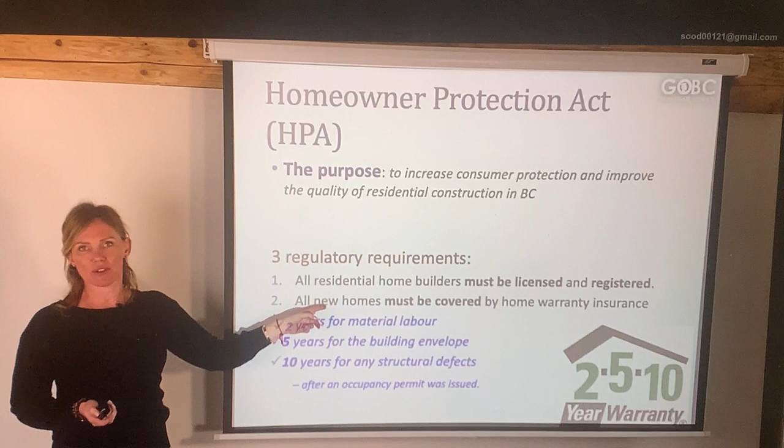So far there are 3 requirements. All the builders have to be licensed and registered. Who are they registered with? With BC Housing, or the Licensing and Consumer Services. They have to make sure they're on that system, and make sure all the homes have coverage for 2, 5, and 10 years. When I say all homes, I'm talking about new homes. If it's a new build, that's the one that has to have those warranties. Number 3, all the homes must be registered in that new home registry plan.

So basically, if you're working with a purchaser who wants to buy one of the new builds, or if you're shopping for yourself, you go on the BC Housing website and type in the address information for that property you're planning to purchase. This way you can determine the licensing and warranty status of that home. So you can find all the information. What type of information? Pretty much everything.

Can you find information about the builder? Yes, you can. Is he licensed? Is he properly licensed? Is the home properly registered? The warranty insurance, when did it start? The commencement date of the insurance. If it's an owner-built home, can it be offered for sale? Can you actually sell that house? All that information will show up on that BC Housing website.

So what if you want to build a house just for yourself? You bought a lot and you're planning to build and live in it. Do you still have to be licensed? No, you don't have to. That's an exemption if you build for personal use. The person must intend to personally use the home for at least 1 year from the date of occupancy and may not rent it during that year. So basically, when you get the occupancy permit and move in yourself, within a year you're not allowed to sell it or rent it out to anybody else.

But what happens then? What if you want to sell it after? What if your plans change and you decide to move to a different province? Can you do this? You have rights, you can sell the house, and that's where you check back on the website to see if the owner builder can offer the house for sale.

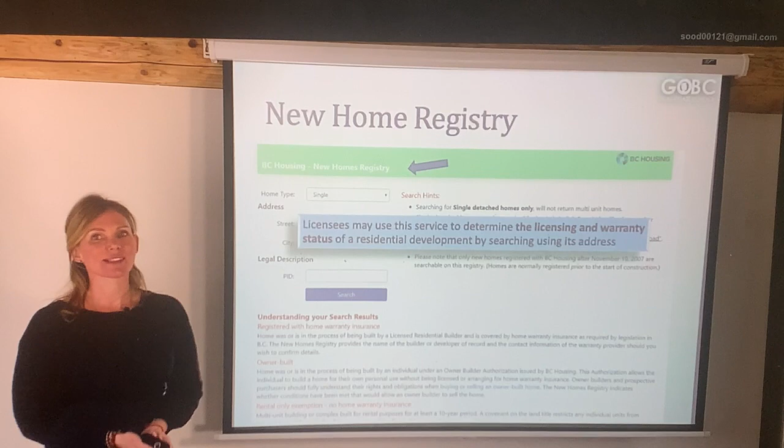So as an owner builder, you don't need to have that 2, 5, 10 year insurance, you don't have to purchase it. But if you're planning to sell it, you will be personally liable to the new purchaser for that warranty. So you still have to provide it one way or the other. Just know if anything happens to the house within the 2, 5, or 10 years, as the owner builder you will be personally liable to the new purchaser for that.

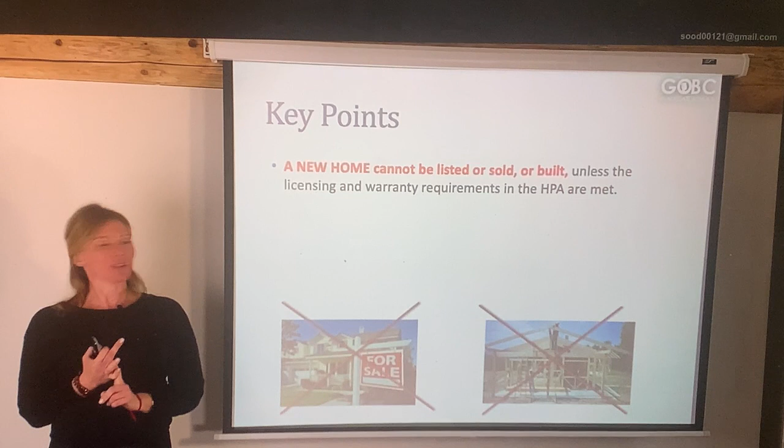Okay, key points, let's go back over everything. Can you sell a house that has not been approved by HPA or BC Housing? You're not allowed to. The house cannot be listed, sold, or built unless all the warranty requirements are met by the HPA.

Number 2, what if your home is less than 10 years old or has been substantially reconstructed? What is substantial reconstruction? If you renovated the property more than 75%, that's substantial. If you add to the foundation of your property to make a bigger house, that's also substantial reconstruction.

Licensees should take steps to ensure that all insurance and licensing disclosure has been properly done under the HPA and incorporated into the contract of purchase and sale. So if you're working for the buyer, you add it into the contract, stating we want to see those warranties, we want to make sure the house is protected. Buyers must be aware of all the home warranty coverages to ensure the warranty documents are properly transferred, so make sure the buyer is aware. And then the last one, if you are representing the owner builder, then what do you do?

You want to make sure that everything is done properly, right? Ensure that all the disclosure obligations have been met by them and that they will be able to pass it on to the buyer, so there's no issues.

Okay, so the building code. I don't know if you guys know, but we have a national building code and provincial building codes, basically the codes that the builders have to abide by. On exams, sometimes they'll ask you a basic, simple question, asking what are the top objectives of those codes.

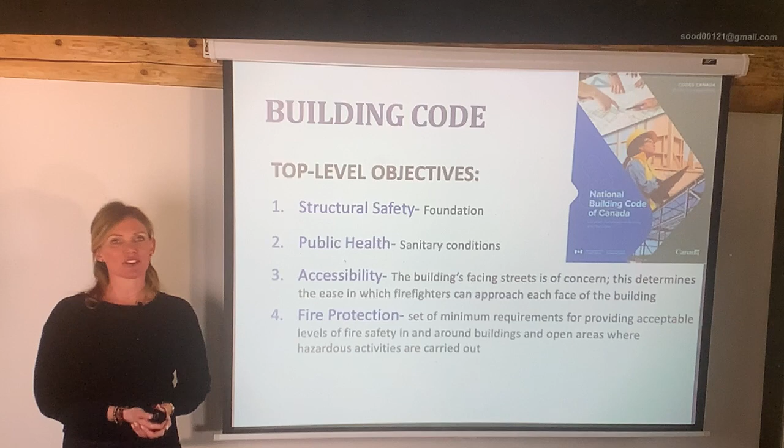Pretty straightforward objectives, right? The first one is structural safety, making sure the foundation and structural parts of the building are good and solid. Public health refers to sanitary conditions, making sure it's livable. Accessibility means, is it easy to access through the road? How fast can we access the building? They're usually referring to firefighters - if the house catches fire, how fast can firefighters get into the building. Fire protection means they have at least minimum standards of fire protection in that building. Basically, that's it, those are the main objectives.

So we have 2 questions. Let's work on question 1. Which of the following is the main objective of the building bylaws, such as the National Building Code or the BC Building Code? What do we have here? Which one definitely fits in? Is it curb appeal? Is it aesthetics? Is it public health, green building? Definitely public health, right? Because that's the sanitary conditions of the building.

Good job. Question 2 is the opposite question: which of the following is not a top level objective of the National Building Code or the BC Building Code. So we have structural safety, which is the foundation of the building, public health, sanitary conditions, we have aesthetics, making sure it's beautiful, and fire protection. Which one is not one of them? Of course, aesthetics, because you don't have to have a beautiful or pretty looking building for the building code - they don't care. But health, fire, and structural safety, that is a must.

Okay, so we're going to talk about the metric construction module. This is something our students don't really like or understand, but I'll make it nice and simple for you, I promise. So basically in Canada and US, you guys like to use the imperial system, so you use feet and inches. But the whole world uses the metric system, that is millimeters, centimeters, kilometers. That's kind of what the metric is about.

So when it comes to building, they decided to have a uniform system so everybody can understand this. So what they've done is Canada and US said, okay, we'll give up on the imperial and switch everything to the metric system. So this is what the changes came through. Some changes were soft, meaning they're not a big change, just a slight change - the definition will change, from inches to millimeters, so the verbal definition changes but the size itself will not change.

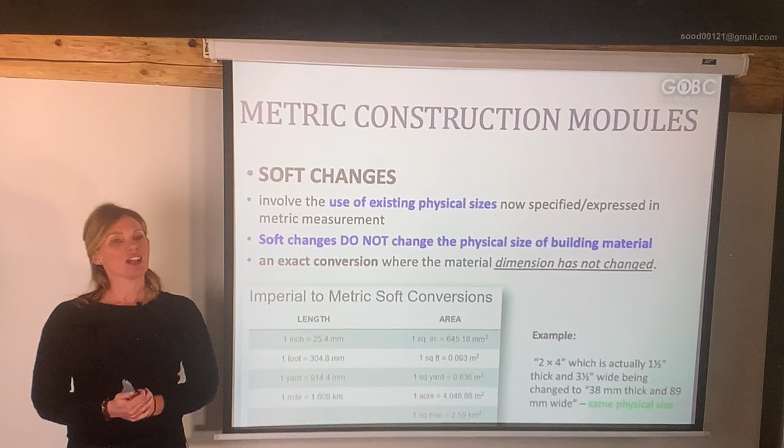So basically we change the way we phrase it - instead of inch, we're going to call it millimeters, okay, but the size will not change. So if you convert 1 inch to millimeters, it will come up exactly as 25.4 millimeters, and that's it, okay. So that is a soft change - we changed the verbal definition but haven't changed the size. It's exactly the same size, okay.

But when it comes to the hard change, that means they actually made a change - from verbal description, from inches to millimeters, that's the first change, but also in the size. So for example, if I take 12 inches as an example, and convert them with a hard change, it comes up to 300 millimeters instead of 304.80. So if I take 25.4 millimeters and times it by 12, it comes up to 304.80. That is a soft change.

Why is it a soft change? Because I just changed the inch to millimeters, but I haven't changed the size - that means 304.80 would stay as is. But if I change the actual size, and instead of 304.80 I come up as 300 millimeters, so I change the size too, then that is a hard change.

So a hard change is basically a bulk change. I'm not going to just take like 304.80, that's too precise. I'll just make it 300 millimeters. You see what happens? I just made it a flat number.

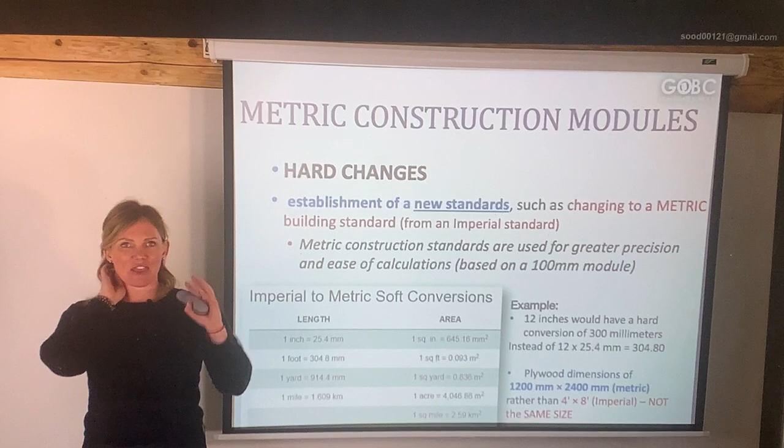So how do you know if it's a hard change? It changes the size, and that's all I want you to know. There's no math on this. Nobody's going to give you math questions, but they will talk about something like this, I'll show you the question.

Question 3: if the metric building module is increased from 100 millimeters to 150 millimeters. This would be considered as which of the following? So did the verbal description change? Not in this case, it's from millimeters to millimeters. But did the size change? Do you see what matters? And if the size changed, yes, 100 millimeters to 150, that's the size change. That is definitely a hard change. Okay, so that's what I want you to look for.

So now we're going to talk about the actual measurements, when it comes to measuring an apartment building. Let's say you have a new listing, it's a 2-bedroom apartment with a beautiful patio, and you say wow, look at that patio, it's the largest one out of all your neighbors. You have the largest patio. So can you include that patio into your square footage?

I hope you said no. So how do you know what's included in the square footage? It's everything that is livable. Whatever you can live in, that's what you're going to use as square footage. That's why a lot of new developments have small closets. Why are closets so small? Because they know that's not real square footage, right? It's excluded from the square footage.

So this is a list of things you're not allowed to include into your square footage: garages, porches, balconies, decks, unfinished floor areas. Now that's a question mark for a lot of people, they say what do you mean? I have an unfinished basement, it has a lot of square footage, why can't I use that as partial towards my square footage? And he says no, you have to add it as an extra description. It says comes with unfinished basement, but you're not allowed to take that square footage from the basement and add it to your main square footage.

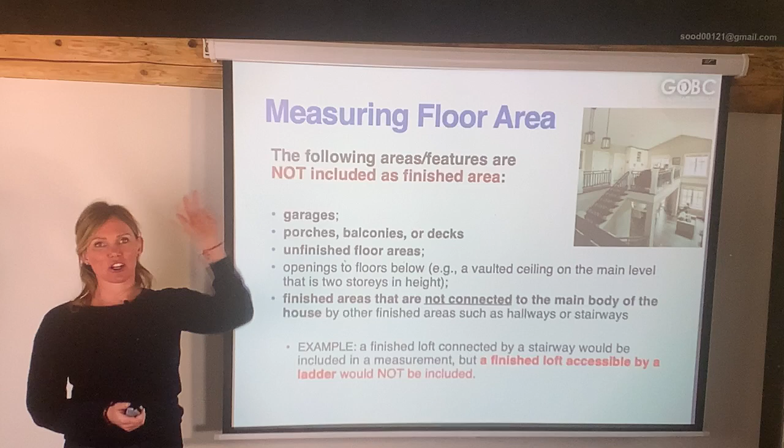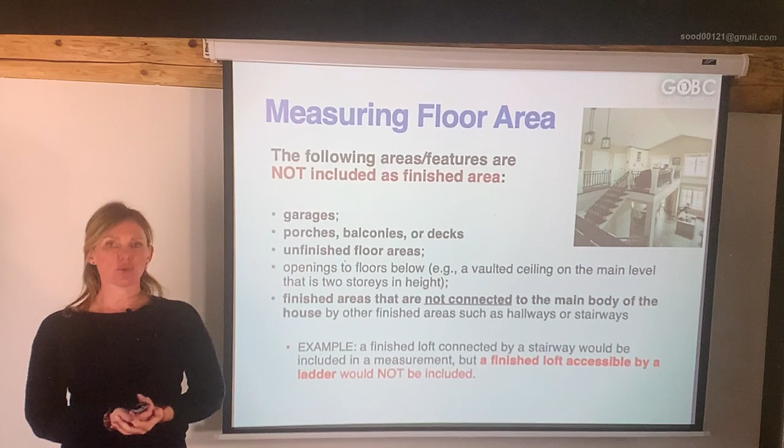And opening to floor below, so if it's a vaulted ceiling covering 2 floors, you're not allowed to add that as extra square footage. And finished areas that are not connected to the main body of the house - what does that mean? If you have an attic that's not connected, no staircase, no way to get in there, just a detachable ladder, you're not allowed to use that as square footage. But if that attic had an actual built-in staircase so you can walk there, then you can use that as square footage. Okay, let's continue.

Okay, so now we're going to talk about substructures and superstructures. How do you know the difference between those two? If I say sub, think of it as a subway - what is the subway? It goes underneath the ground, right? So same thing with a substructure, that's something that goes below the ground level. For us, that will be the foundation of the building. It's built below ground level, and it serves as support for the building or structure - it supports the whole building, that's the whole idea of the foundation.

For the exam, they like to ask you about damp proofing, and they like to ask you that as a definition. They will say, what does this stand for? I don't know if you guys know what that is, but it's that black sticky material they apply to the walls of the foundation to make it waterproof.

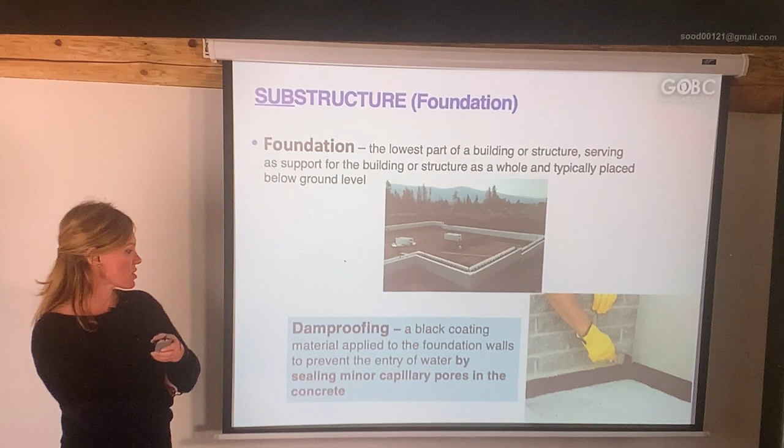They seal all of those capillary pores in the foundation with that black sticky thing, and it seals it so the building becomes waterproof. That's exactly what this damp proofing is - black coating material applied to the foundation of the walls to prevent the entry of water by sealing minor capillary pores in the concrete.

So this substructure is below the ground level. The superstructure is everything that is above the ground. And we have a lot of them that we're going to talk about - the joist, the stud, the plate, the truss, and gosh, there's a lot of them. You never know which one is going to be yours on the exam.

So let's start with the joist, stud, and the plate. When somebody says the joist, the stud, and the plate, look at the picture, that will help you out. So if I want to put something into this wall, what am I looking for? I'm looking for the stud, because that's where I can hang things, heavy things. So the stud is a vertical frame, it goes this way, that supports the wall, behind the wall, so it supports the wall.

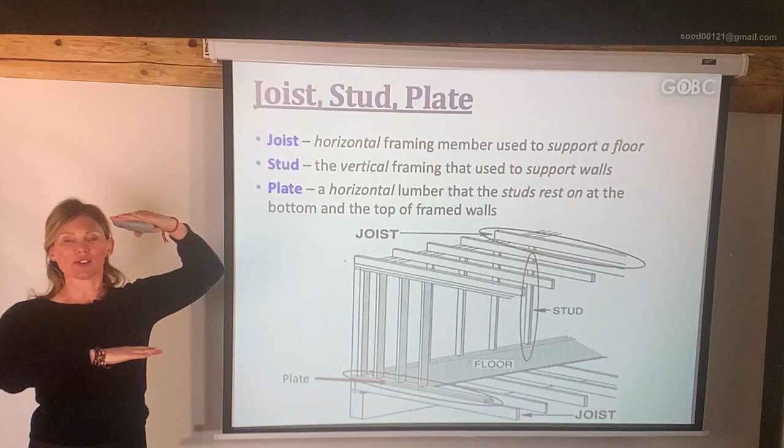So if you know what the stud is, then you have to know what is joist. Joist is always opposite from the stud. I had 2 older ladies in one of my classes, and one lady says to me, come on Yana, this is a stud, you should know that. The whole class laughed. But anyway, stud is always vertical, and if you know what stud is, then you know what joist are - joist is opposite, it's horizontal. Now think of the joist as supporting the ceiling and the floor, so it's in the ceiling and it's in the floor. And the stud will be opposite, it's behind the wall, so it supports the walls.

Good, now the next one is a plate. Think of the plate as the actual plate - if you're eating your supper, your dinner, you want that plate to be horizontal in front of you, and then you will eat it. Because if that plate was vertical, then the dinner ends up on your floor, not good. So same thing - think of it as a washer in between the joist and the stud, it's the plate in between. So it's the horizontal one where the studs rest upon.

Then we have to know the different types of roof structures - truss and the rafter. Keep it simple. When I say truss, think of it as a prefabricated roof, something that you can't really build yourself. It's engineered, it's more complicated if you look at all the designs in here. So it's something that supports the structure, but it's prefabricated.

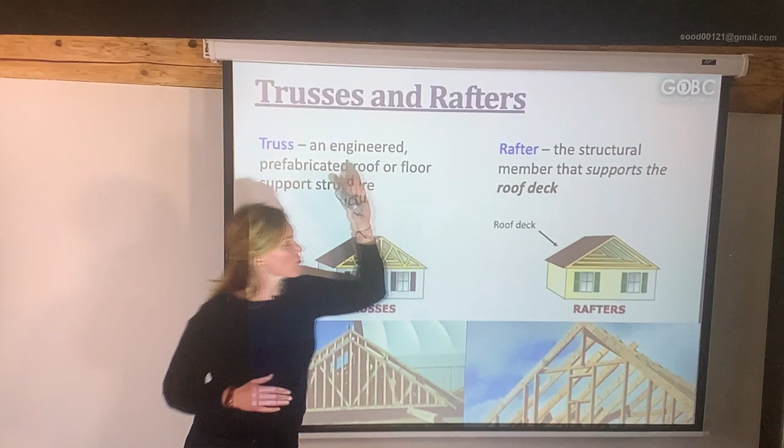The rafter is what they want on the exam. So rafter, think of it as a roof deck - it's a structural member that supports the roof deck, something you can build yourself, and the roof deck goes on top of it. So in the exam, if we talk about the rafter, I always think of it as R and R - rafter comes with a roof deck. If they don't talk about the roof deck, that means it's not a rafter.

Keep it simple. Okay, question 4 - look, they're looking for that rafter. In residential building construction, the term rafter refers to roof extension used to provide an extra floor area, and the windows - I don't see the roof deck anywhere, so that's not the answer. Option 2, the structural member usually wood placed at the top of the window opening - I don't see my roof deck anywhere, that's not the answer. The roof style commonly known as a hip roof - we never even talked about this, so it should be none of the above. So again, rafter, look for the keyword of roof deck. That's it, keep it simple.

The lintel and the header, the two things that you have to know. One comes from the outside exterior openings, the other one's for the interior opening. Think of the one that we have in the house because that's the easy one to remember - on top of your doors, on top of your windows, you have the headers. The header is the interior opening, so that's a supporting structure in the interior of the house. But the lintel, it comes supporting the structure over the exterior opening. So from the outside of the building, if you have something on top of your window, that is a lintel.

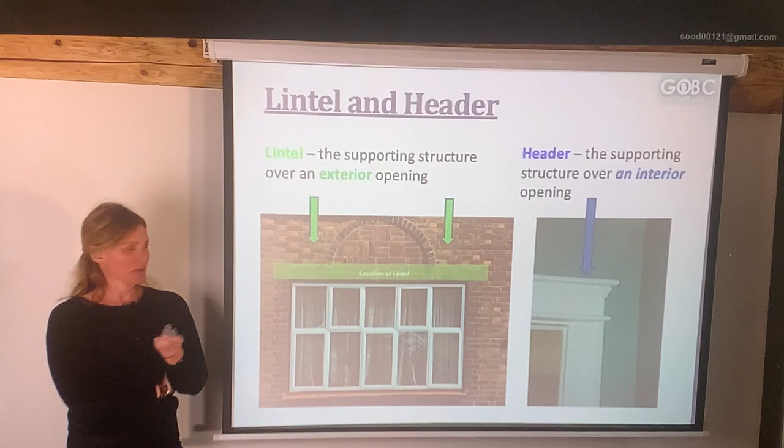So think of the lintel outside, the header is inside. Question 5: which of the following statements regarding the superstructure terminology is true? Option 1, plate is a vertical lumber. I can stop, because what did I say about the plate? If you're eating your dinner, that plate better be horizontal, not vertical. So if it's vertical, that is a false statement.

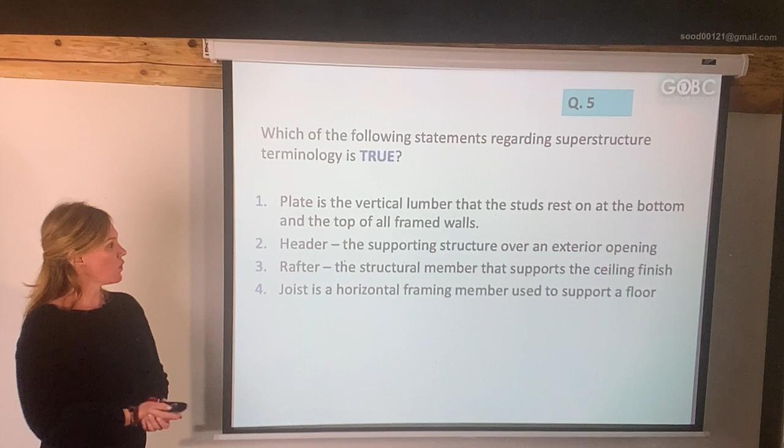Header, supporting structure over the exterior - no, header is the inside of the house, right? On top of your doors and windows. That's false. Rafter, I'm looking for the keyword of roof deck. Do we have that? Nope. And the joist is horizontal. So if the stud goes this way, the joist goes horizontal. So option 4 is the right one.

When you go through the questions, I want to make sure that you know the other options - why are they true or why are they false? Make sure that you highlight those keywords so this way you know what you're aiming for.

Good job. Okay, so what can you build a building out of? Could that be a log building? Have you seen the log buildings? Yes, we have those ones. An A-frame building, it's an older type of style. It's brick, that's Europe. Stone, concrete, Western platform wood frame. We have a lot of those ones in BC, and the post beam and plank.

So for the example, they ask which one is the most commonly seen in British Columbia. And if they don't specify the type of house, then that would be a wood frame. Why don't they specify? Because if I say a high rise, then that would be concrete. But if I just say which one is the most commonly used style, then that's a wood frame. You get the point, right? Because wood frame cannot be used for high-rise buildings.

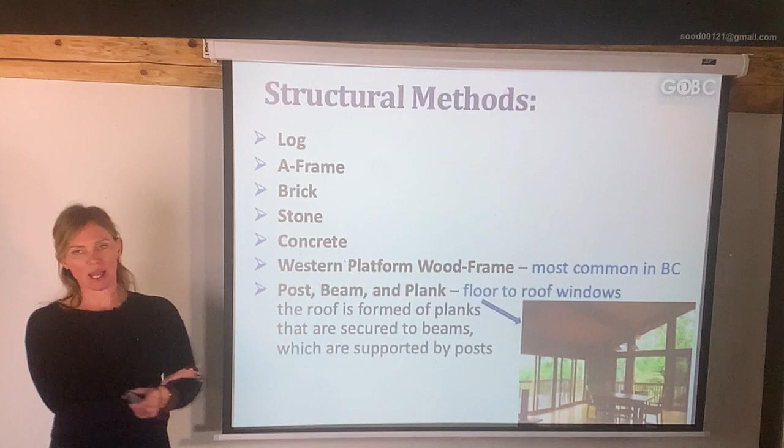High-rise is only concrete, it's not strong enough. Post beam and plank style, now usually the style that has the windows all the way from the floor to the ceiling, so it's very, very large windows. Post beam and plank is the roof formed of planks that are secured by beams, which are supported by the posts, right? So that's why it's post beam and plank. It's pretty easy to remember.

Question 6: which of the following statements regarding the post beam and plank style is correct? Option 1, it maximizes utility of a narrow lot according to the zoning criteria. We never talked about that. That's definitely not true. It is one-story building, usually incorporated with the garage under the continuous sloping roof.

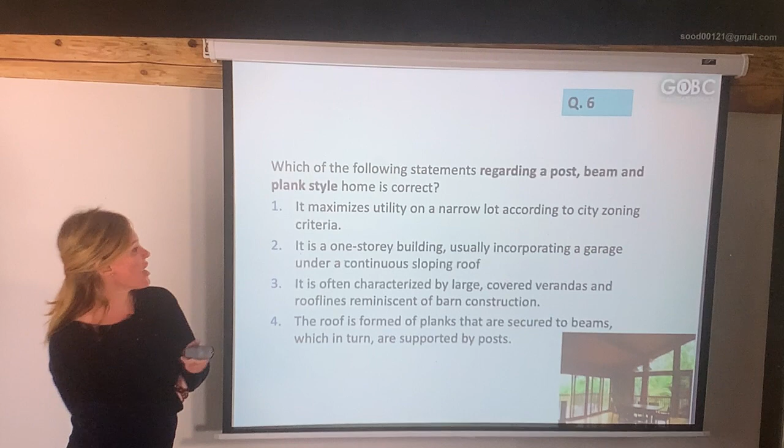Can you put that rancher in here? Because that's the definition of a rancher, one-story level. I'll teach all that stuff later. Under one roof, incorporated with the garage. Okay, so that's definitely not this style.

It is often characterized by large covered verandas and roof lines - so that's not the one. And roof that is formed by planks that are secured by beams, which in turn is supported by posts, right? You see a lot of keywords, so you know option 4 is definitely the one. All the other ones, don't panic, I'm going to explain the styles. It's coming up, it's coming up soon.

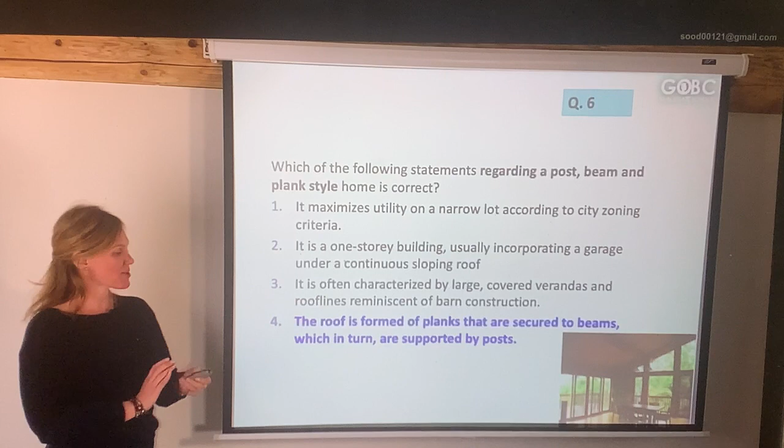Okay, question 7: one way that housing styles can be classified is by the structural method used in construction. Which of the following terms does not describe a type of constructional method? So which one is definitely not a method of construction here? Do we have the log way? Yes we do. Concrete blocks? Yes we do.

Vaulted ceiling - what's a vaulted ceiling? That is a high ceiling, okay? And post beam and plank. So definitely no, vaulted ceiling, because that's not a structural method, it's not the type of house that you will have, it's just one of those, how to call it, a feature of the home. On the exam, sometimes they'll give you drywall - same thing, drywall is just the material that you use inside of the house, it's not a structural method. So no drywall, no vaulted ceiling.

So now we're going to talk about different types of frames. You have to know the difference between the wood frame, the concrete, the steel frames - there's 4 different frames that you have to know. So what do we use the wood stud frame for? It's very commonly used, but it's used for what type of building? High-rise or low-rise? Now, that's definitely for the low-rise, right?

So this is something used for the low-rise building. You can't build something higher than a 6-story building with a wood frame because it will fall, right? So stairways must be enclosed with fire-resistant material if you're building something higher, like under the 6th floor, but you have to have the stairways enclosed. So what are the advantages?

It's a low cost, right? So think of it this way. In British Columbia, we have a lot of wood, a lot of trees. So for that reason, that is an advantage, it's a low cost method. And what is the disadvantage? What happens to wood sometimes? It shrinks, right? So if water goes in there, it can do all different things to it. So that's the only issue with the wood frame.

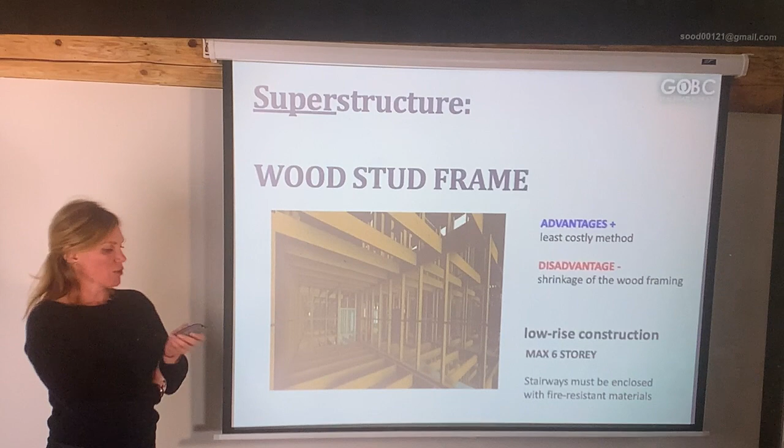The steel was used in the past. So the older buildings we used to have, they used to use this steel, but these days they don't use it anymore, and you'll know why. Why don't they use it as much? Because it costs. It's very expensive to build something with a steel frame building, right?

So cost, and it costs more to fireproof. That is an issue with steel frames, because you still have to build up the walls around the steel frame to make it more fireproof. So that means whoever is the builder and they're planning to build with steel, it's going to cost them more in the material, but it's also going to cost them more to fireproof the building, to pass those fire codes.

Now, this is also a disadvantage: no room for change, hard to redesign this steel frame. So when it's built, it is built, and you can't change or move things, right? And it requires additional fireproofing. That's a huge one for the exams.

So what are the advantages? Non-combustible, that means non-flammable, right? So that means it's good. Non-shrinkage, it's not like wood, it cannot shrink. Can be built very quickly, greater percentage of usable interior space, and fire resistance can be added, but you still have to spend money on that, okay? So just know that's not commonly used anymore.

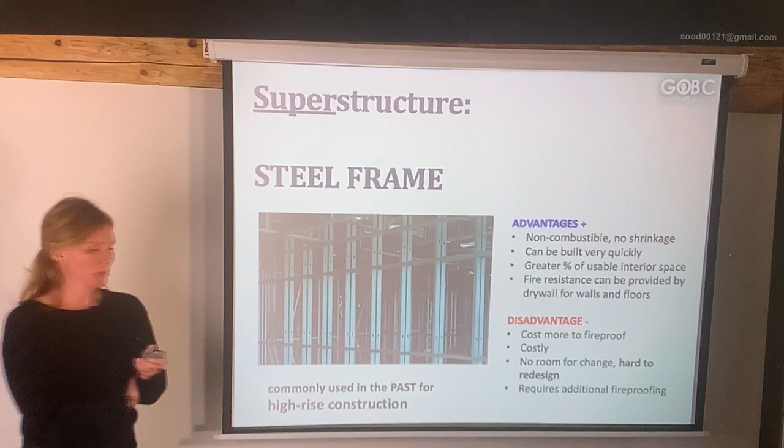It's in the past. So why do we like concrete? Because look, do we have any disadvantages here? Absolutely none. Why do we like this style so much? Because it doesn't cost as much. It is easier to remodel or change things, redesign things. You don't need extra fire safety, so you don't need to add on any more fire protection. It says maximum fire resistance already comes with the building, and no additional protection is required to fireproof this building, okay? So more flexibility when it comes to design, and more economical, so it doesn't cost that much.

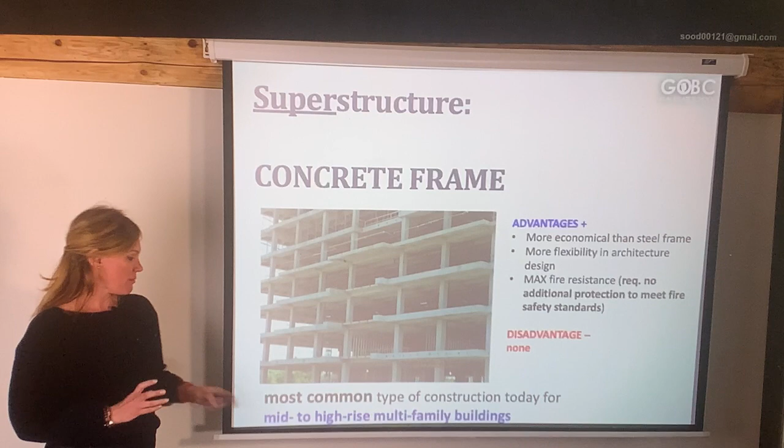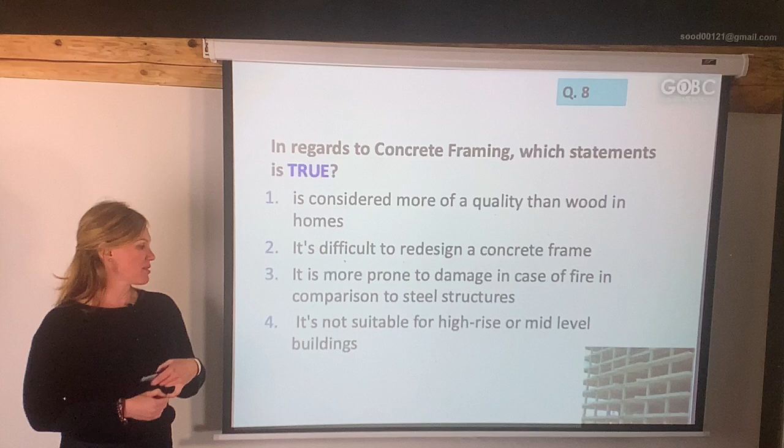Okay, question 8. In regards to concrete framing, which statement is true? It's considered more of a quality than wood in homes. Is that true? We'll talk about this in a minute. Option 2, it is difficult to redesign a concrete. Do we have any disadvantages with concrete? None. So for that reason, it's easy to redesign, that's false. It is more prone to damage in case of fire compared to steel. That's definitely false, because concrete has no disadvantages. And option 4, it is not suitable for high-rise and mid-rise. It is definitely suitable. So option 1 is the best one out of all of them: it's considered to be more quality than wood homes. So basically, even if it's your detached home, you should try to build it with concrete, it's much better.

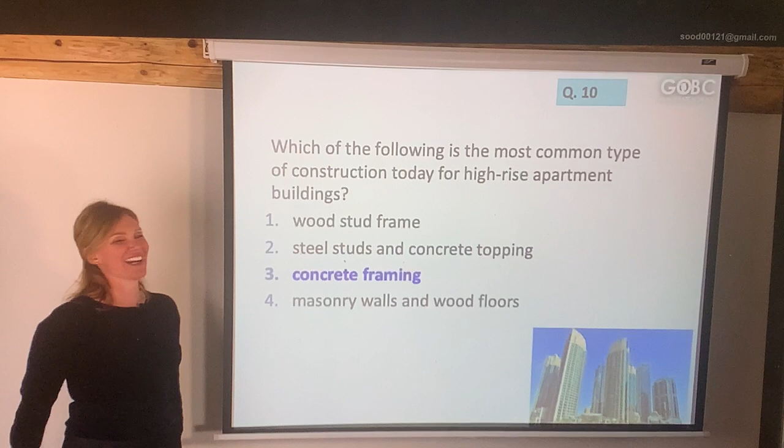Question 10: which of the following is the most common type of construction today for high-rise apartment buildings? Good job. Definitely concrete is the one.

Okay, so now we're going to talk about the building envelope. Think of that as a skin of your building, like we have a skin on us, right? What is the skin for? It's to protect you, all your organs and all your bones, to keep it all in place.

Same thing when it comes to building envelope. Think of it as a protection from the wind, from the dust, from the moisture, from all the rains that we have in British Columbia. So we have the doors, windows, and insulation to protect us. That's called the building envelope - think of it as the skin of the building. We have that. And why do we want to talk about this?

Because in British Columbia, we had a lot of issues with the leaky condos crisis. You've heard that, right? Leaky condos. Now, what are those leaky condos?

When they were building buildings then, they thought that if they sealed the exterior walls with sealant, it would become waterproof. That was a false idea, because they did not realize the water was still going to go through the insulation. And what happens to that water? It gets stuck in the middle of that wall, and that's where the mold comes through, and the wall starts to deteriorate. That's where the leaky condos start breaking down like crazy.

And there was no money in the contingency fund. All the people that owned those apartments or buildings had to pay out of their personal pockets. That was a crisis that everybody had. So leaky condos was a big problem.

So then BC Building Code came up with this rain screen. They said you have to incorporate it in all of the buildings in BC now, because we do have a lot of rain here.

And this rain screen, what it does - instead of focusing on the exterior walls, it basically lets the water go through, dry out, and get out, right? That's kind of how it works, so it doesn't go inside of the walls itself, and the moisture doesn't stay in.

So you don't need to know all that information. All you have to understand is what the building envelope is for - to protect you from everything. You protect your building, basically.

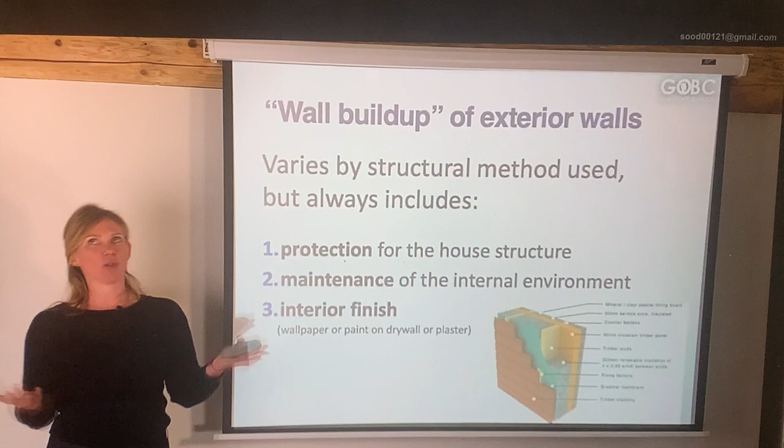Don't be scared of the slide. I know a lot of people look at this and think, oh my gosh, there's a lot of information. That just shows you how you build the wood frame exterior wall - how the wall is made out of. When we built my office, I was watching them, just to see how it looks. It doesn't have all the steps.

So we'll go from the inside out. Interior finish - so what do you have? Do you have paint? Do you have wallpaper? Makes sense. Then the vapor barrier.

Usually in real life we call it poly - it's just that plastic they put in there to protect from all the moisture. Then insulation, usually glass fiber batt - so pink or yellow things, the ones you put inside to have the insulation. Then the wood frame, and then we have the plywood.

And then building papers from the outside of the building, and then you put the siding on top of it - it could be stucco, it could be whatever that is. So don't be scared of this - that's just to show you how we build up the layers to protect ourselves from all these problems we might have.

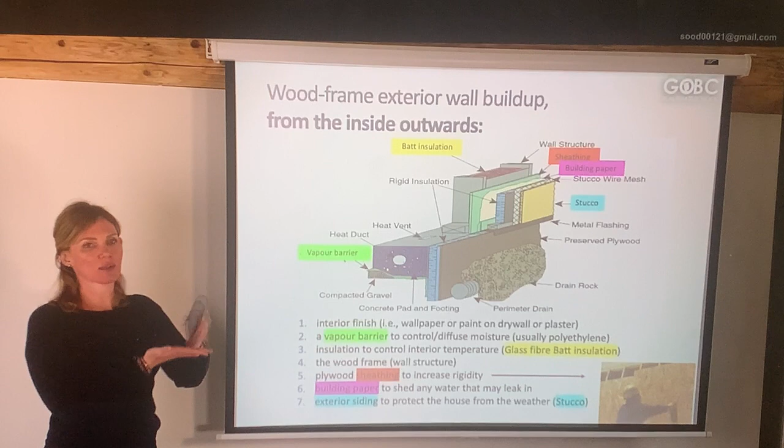Okay, so when it comes to roof, a few things you have to know. It's pretty simple.

First, you have to know what zinc is for. Every time you have a roof that's in the shade, it can create moss, and it's very hard to get rid of. So what do you do? You add a zinc strip on top of the roof to prevent the moss. On the exam, they'll ask what's the zinc for? To prevent the moss. Simple.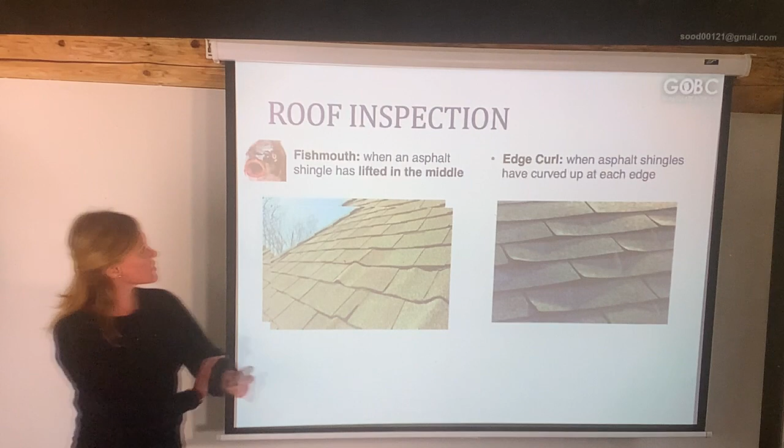You have to know the different types of roof inspections, so when you look at a roof you can say what's happening here and there. We have a fishmouth - it's a circle kind of thing, those little sticking out circles, when the asphalt shingles have lifted in the middle. If it's in the middle, that's a fishmouth. The edge curl is when it curls up at each edge, when the asphalt shingles have curved up. So that's what you have to know the names for.

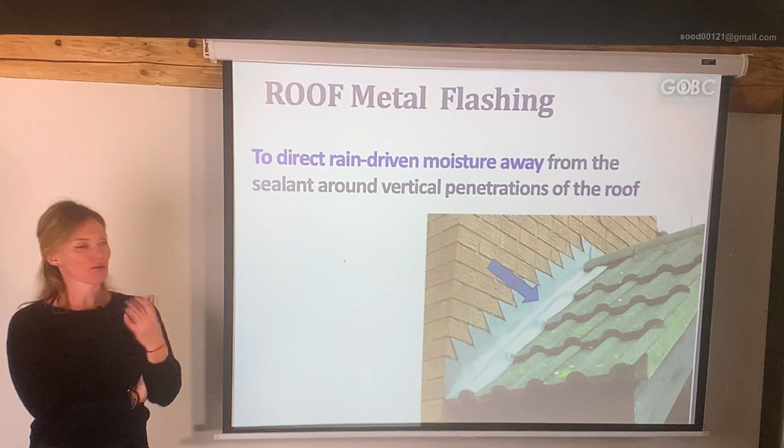The last thing you have to know about the roof is the metal flashing. I personally have never seen this, but apparently they put this to direct rain-driven moisture away. So that's for moisture protection too - it seals the roof, metal flashing.

Now we're going to talk about external cladding, basically how you finish the building from the outside. I want you to know that aluminum or vinyl siding is the best, because it's low cost - it doesn't cost you that much, and it's very durable. It lasts you for a long time.

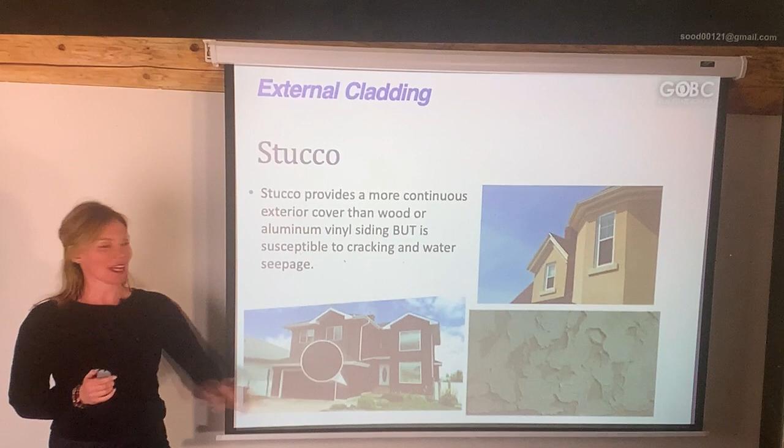Stucco is not very popular anymore. We see quite a lot of buildings still built with stucco exterior, but because of the rains, it cracks and peels, and it doesn't look that beautiful after a while. So that's the problem with stucco.

Now we're going to talk about doors and windows - a lot of random information in this chapter, but that's what it is. When I refer to exterior doors, you don't have that specific slide in your notes, it's just common sense. What can you build the doors out of? Can you have a rubber door? It would be nice, but no. You usually make it out of wood, metal, or glass.

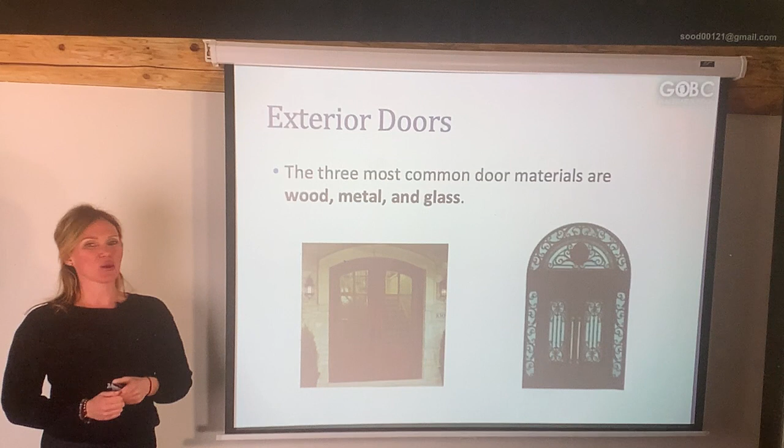But when it comes to interior doors, you have to know two different types. We have sliding doors, also called sliding pocket doors, and then we have folding doors. Folding doors are the older style that just fold. The sliding doors are the ones that slide inside of the frame wall, in and out, just like this.

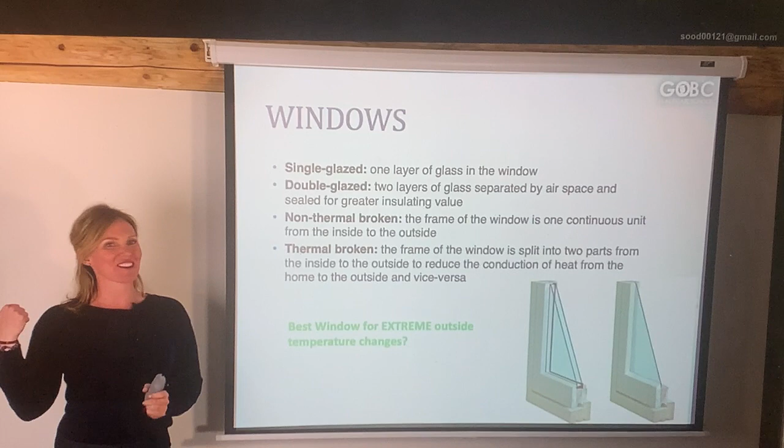Now the windows. For the exam, you have to know which window is best for extreme outside temperature weather. So if it's minus 45 right now and you're freezing, and it asks what should I do, I'd tell you to get a better type of window. A double glaze has a double window in there, and a single glaze has only one window. A single glaze comes as a non-thermal broken frame, but a double glaze comes with a thermal broken frame. So which one is better? Choose the double - the more insulation it has, the better, because the heat will stay in. So double glaze with a thermal broken frame is the best type of window.

For the exam, we need to know 4 different types of windows. You have to know what type you're looking at - they'll give you a story and ask what is this, what type of window? How do you define which window you're looking at? It depends on the hinges - are they at the top, on the side, or at the bottom? Let's look at the first two: the awning window and the hopper window.

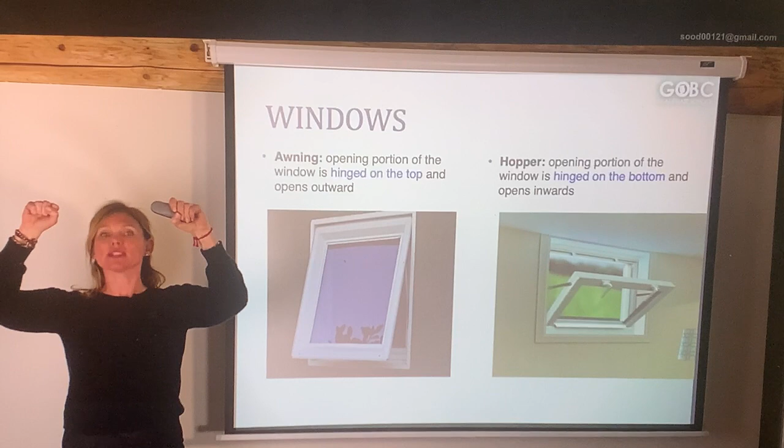An awning window - think of the letter A, just like this. If it's an awning window, the hinges will be at the top. That's how my students remember this: awning, hinges at the top, opens outwards. The hopper will be the opposite, so the hinges are at the bottom and it opens inwards.

Usually we use those ones at the bathrooms.

Then we have the casement window. Think of the casement as the letter C, right? My students always think of it as a letter C. And if it's a letter C, the hinges will be on the side of that window. That's how you have to think of it, and it opens outwards. Then tilt and turn, it's kind of a combination of the casement with the hopper window.

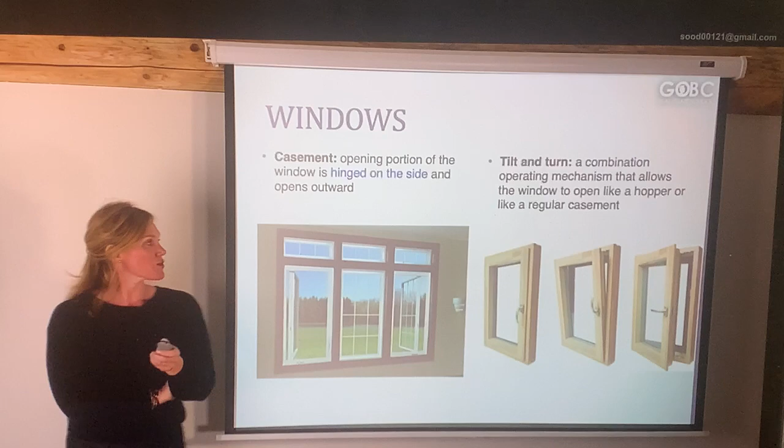On the exam, we don't really see that one, but it's mostly about the hinges, the word the hinges. So let's do two questions. Let's see if you understood them. So you have question 11.

House has a window with the hinges at the top and opens outward. What type of window is this? What do you think? Hopper, casement, awning. I hope you said awning, right? Because if it's at the top, letter A, just like that. Okay, one more. Let's see if we can get this one.

House has a window with the hinges on the side. What type of window is this? Good job, casement window, right? On the side, that's the letter C.

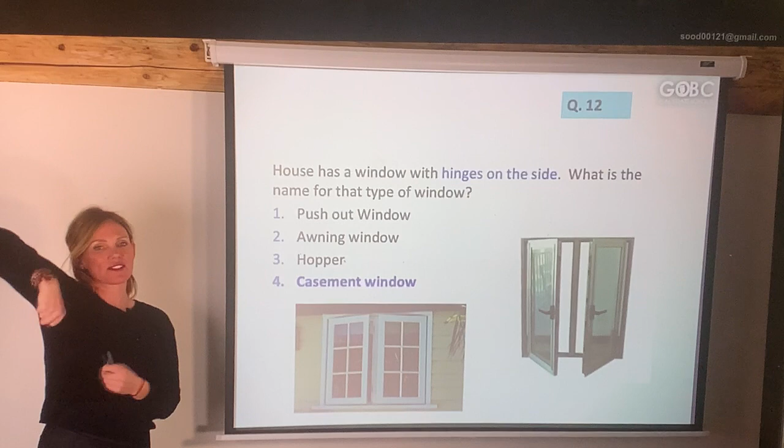Okay, good. So now we're going to talk about insulation. Two different types of insulations you have to know for the exam: the glass fiber batt insulation, and the cellulose fiber insulation. The most commonly used is the glass fiber. That's the one that you're going to see in different colors, pink, yellow, or white. And the way we determine how good is the insulation is based on its R value.

So the thicker or the higher the R value, the better the insulation is. For example, when I was building the studio, I had to make sure that they would build me with the highest R value insulation because I want to be sure that I can talk. So that's kind of the idea of this.

The cellulose fiber insulation, that's a different type. That's the one that they spray, right? It's not just foam blocks, they spray it, and it's made out of shredded recycled newspaper. They put some chemicals in there, and that prevents fire and mold and fungi and different pests, like rats and stuff like that. People put that usually in the attics.

Question 13: which of the following statements is a true statement? Because it's an ABCD question, you're going to use the method of elimination. We're going to find the one that we know, and then we're going to go through the answers.

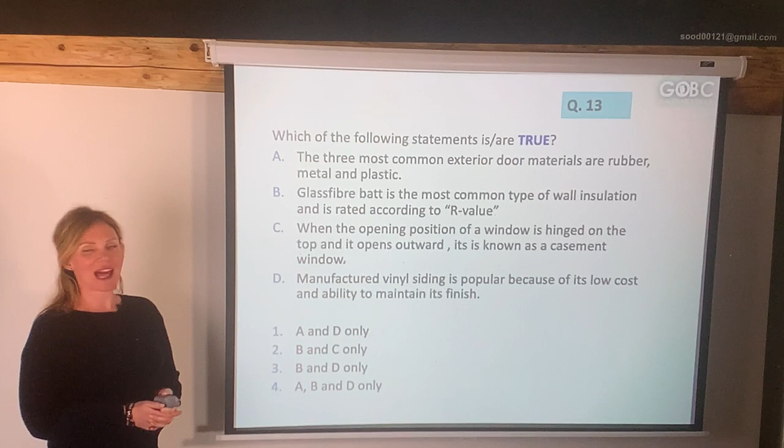So look at option A: the three most common exterior door materials are rubber, metal, and plastic. What do you think? No, definitely no rubber, definitely no plastic. So that is a false statement. I already know A is a false statement, so whatever has A, I would cross it off. So I know option 1 is out and option 4 is out.

If I look at option 2 and 3, you see the B is already in there, so I don't really have to read the B. I know it has to be a true statement, but the C and the D is where I have to focus on. Let's look at option B to see why it's true: glass fiber batt is the most common type of wall insulation, and it's rated according to the R value. That's true, so we don't have to look at this, but C and D is what we have to know.

Option C: when the opening position of the window is hinged at the top and opens outwards, it is known as a casement window. Is that true? It's definitely false, if it opens on the top, hinges on the top, opens outward, that is your awning window. So for that reason, that's a false statement. So I already know the answer should be number 3.

Manufactured vinyl siding is popular because of its low cost and ability to maintain its finish. That is definitely a true statement. So B and D are the true statements. Good, next one.

So now we're going to talk about HVAC systems. What does HVAC stand for? H stands for heating, V is for ventilation, and AC is your air conditioning.

We're going to spend a lot of time on the heating and just a little bit on ventilation and air conditioning. For the exams, they want you to know we have so many different types of heating systems. This is just for multifamily heating - if you live in a condominium where you have neighbors, if you live in a strata, a high-rise building, that's the multifamily heating system.

If you live in one of those buildings, out of those 4 systems, which one do you have? Most of you will have the electrical one. How do you know if it's electrical? Because every single room can heat up separately - do you have the adjustments? Yes, that's exactly what that is. It's a very flexible system, nice because every single unit can heat up separately and independently from the other neighbors. You can heat up each room separately to determine what temperature you want where.

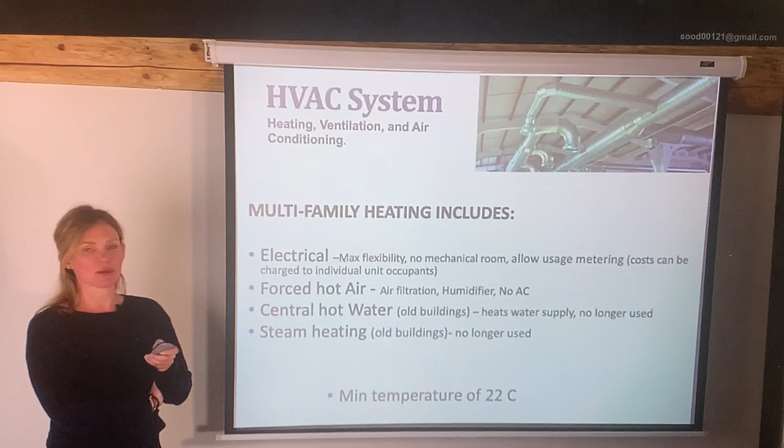So now we're going to talk about detached houses, single family houses, and what type of heating systems do you have? For the exams, we want you to know we have 4 different ones: the electrical baseboard heating system, hot air, hot water, and the wood fireplace heating system. You have to know the advantages and disadvantages of each of them.

So what's positive and what's negative? We already talked about the electrical one. What's so positive about this one? It's very flexible - you can heat up every single unit separately or every different room separately, you don't have to heat up the whole house. You're not going to have any duct pipes anywhere for the vents because there are no vents. No central furnace system, so you don't have to have a furnace there. So that's what's so nice about it - it's a very clean temperature too.

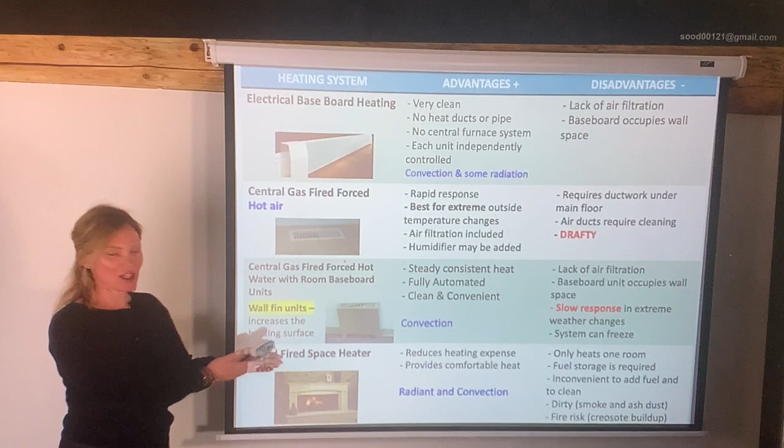What's negative? When they use the word baseboard, that's already a negative thing. Why? Because it takes away your space. If you want to put a couch, if you want to put your bed right next to that wall and it has a baseboard heating system there, it takes away the space from you. So that's kind of a negative thing, but not much.

Next one, we have hot air, forced hot air system - that's where you have those duct pipes. But what is positive about this system? What's positive is that it heats up super, super fast - air heats up fast, water heats up very slow. So the positive thing about hot air is it's a quick, rapid response, especially when it comes to extreme outside temperature weather.

So when it's super cold outside, guess what? You probably want to have one of those systems. Air filtration could be included, humidifier may be added, but you can never add AC.

So what's negative about this system? Sometimes on the exam they'll ask you, out of all these systems, which one is a drafty one? The drafty one, that will be the hot air system. So that's a negative thing, not a positive thing, because your desk could be right next to the vent, and all this air and dust can blow in your face, and that's not that pleasant. It requires ductwork under your floor and the ceiling, so that's where you have all the vents. And the problem is a lot of dust can accumulate in there, or pests like rats can go inside of it.

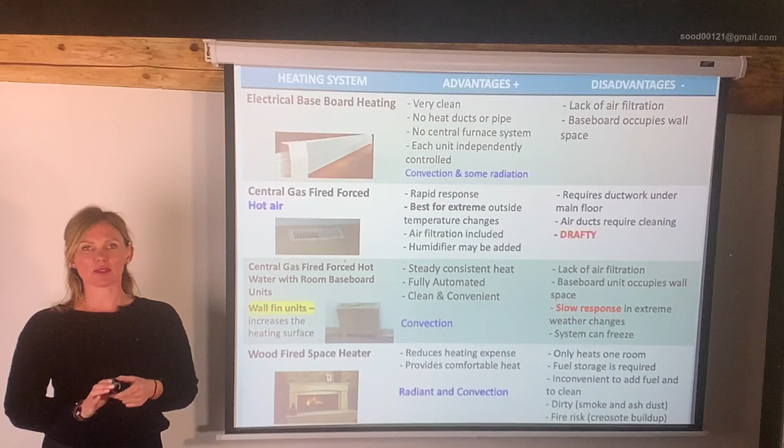That's not pleasant. Next one, the hot water. What's negative about the hot water? We just said that, it's slow. It takes a lot of time to warm up. So it's not the positive one for extreme outside temperature weather. If it's too cold, don't have that, because it's going to take forever to warm up. And what else is negative? It can freeze, because it is water. So that's kind of what's not good about it.

But what's nice about the hot water, when it warms up, it becomes a steady, consistent heat. With hot air, if you open the door, the temperature drops. But with hot water, the temperature is steady, and that's kind of what is nice about it.

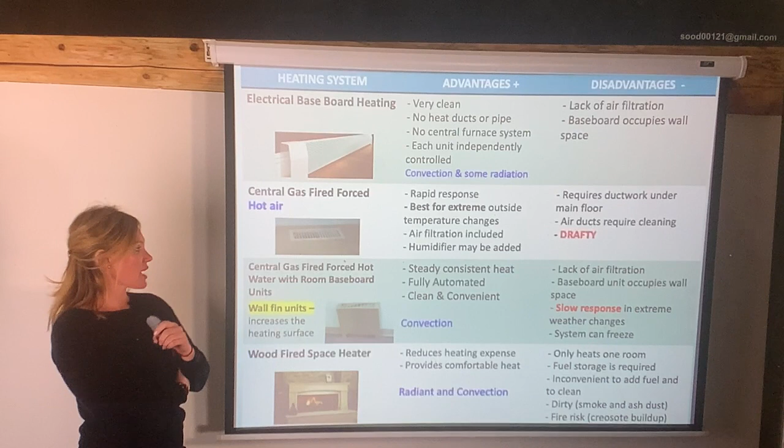So again, for the exam, just know what a wall fin unit is. From my childhood, I remember they were pretty bulky and pretty big ones. The bigger the units are, the more they increase the heating surface. So basically, wall fin units increase the heating surface, the bigger they are, the more heat you will have in the house. But of course, it takes a lot of your space from your house too, so that's not that positive.

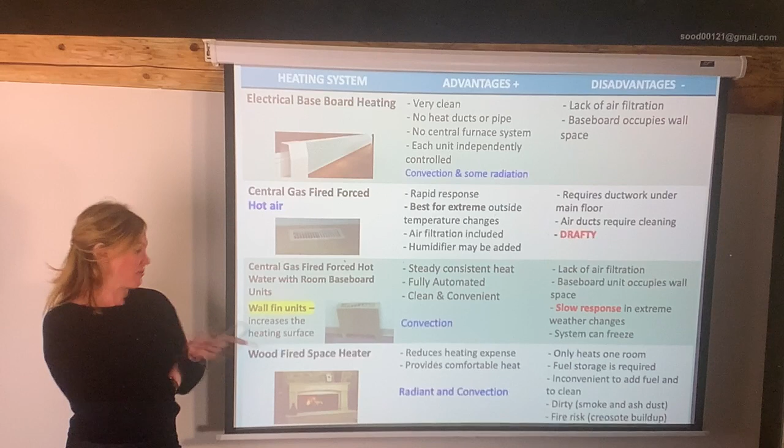So the last one is a wood fireplace. I love that. I live in a house where my main heating system is through the wood stove. What's positive about this is you can send your husband to the woods and say, chop, chop, chop, chop. So it is cheap, it doesn't cost you much, that's a positive. And it provides you with this comfortable heat. This is the only type of heat that gives you that, like when you can feel it on your cheeks and your arms, so that's kind of a positive.

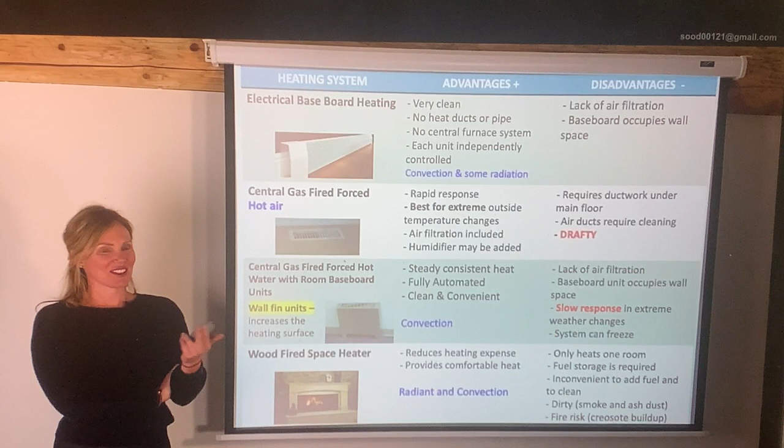But it has mostly negative things for the exam. It only heats up one room at a time. It is a fire hazard. Dust, ashes, all can come from this. You also have to have storage for all of the wood, so in order to warm it up, you need to have this fuel storage, and sometimes bugs go inside of it and stuff like that.

So not that pleasant. Next one, we're going to talk about convection and radiation stuff. Just make sure you kind of understand this. For the exam, they want you to know that every single system is convection heating, so all of them are convection. Convection is basically when the transfer of heat happens and you can feel it, it comes from one item and it kind of affects the other items, which is you.

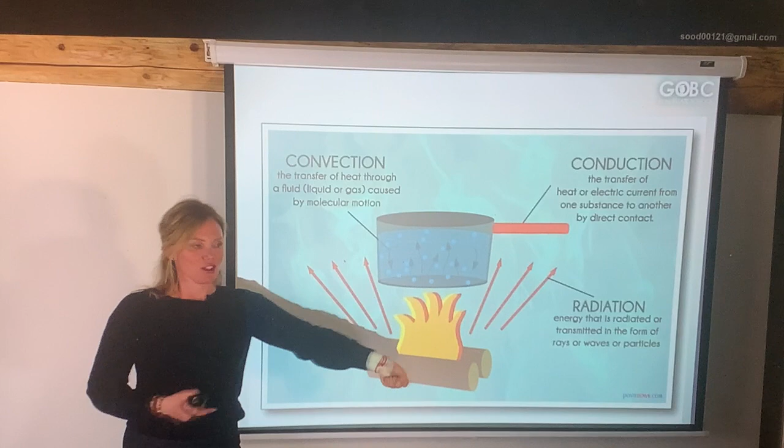Conduction, none of our systems have conduction. Conduction is when you physically have to touch something for the heat to transfer from one part to the other, so you don't want to touch the heating to feel warm. We don't have that.

And the radiation stuff, now this is just an example for you, you don't have to know this, that's just to show you. Radiation happens with two types of heating systems. It definitely happens with a wood fireplace, that's where you can feel that wave of heat coming to you, and that's how you feel it on your cheeks, that's because of the radiation. And also the electrical has some of that radiation too, so you can feel that heat wave.

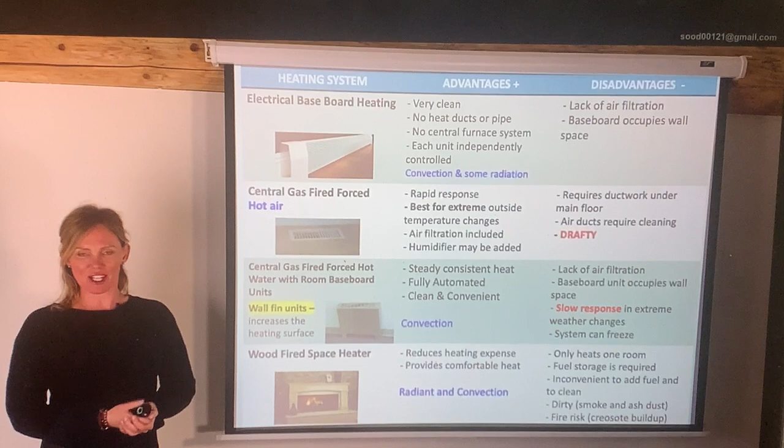So we're going to do question 17. And when we read through the question, I'm going to stop in a couple of parts and you're going to tell me which system would be the best for that.

So Teresa has just added a secondary story to her flat-roofed ranch-style home, and she has asked you to help her determine what sort of heating system to install. Teresa is looking for a clean, convenient system that can respond quickly to temperature changes and can provide both convection and radiation heat transfer. Okay, just looking at that, if it's quick to temperature changes, it definitely cannot be a water system, right? No hot water here. And can provide both convection and radiation, so that means hot air is also out, right? We're left with electrical, and we're left with a wood fireplace.

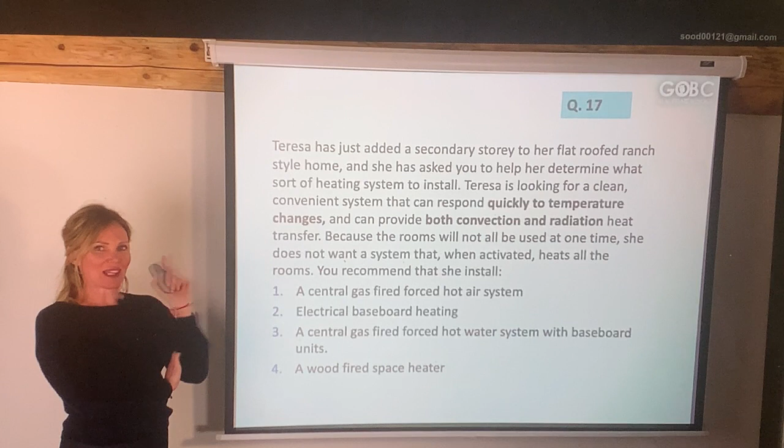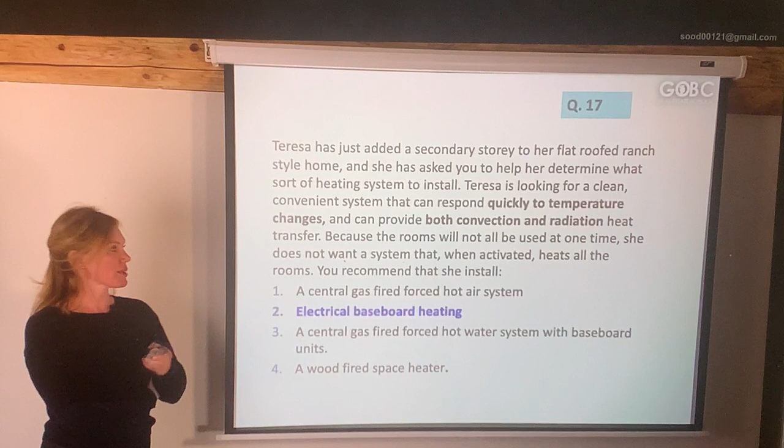So that's good. Okay, now we're going to talk about ventilation stuff. So HVAC: heating, ventilation, and air conditioning. Do we want to have ventilation in our houses? Yes, we do, right? So when you cook, you want to have those vents on top, or in the washroom you kind of want to have those vents in there. So we have all different types of ventilation, including range hoods, bathroom fans, ventilation fans - all different types of fans.

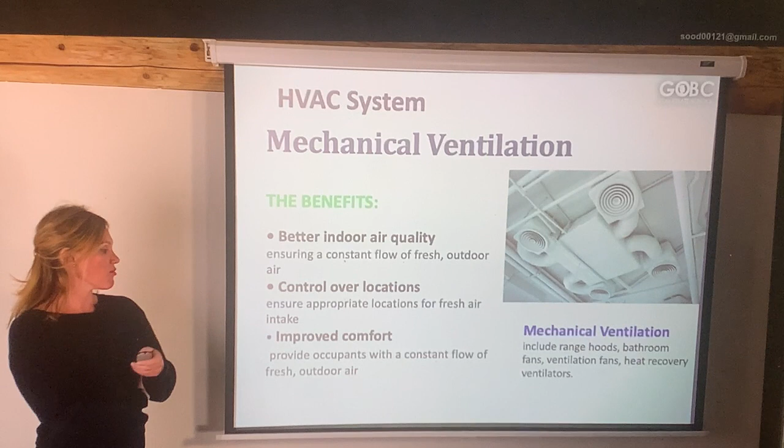So what are the benefits? Better indoor air quality - again, when you're cooking, you want to make sure you have that vent on top of your stove. Control over the location, so you have the right to choose where you want to put those vents. And improve comfort, so you can push the air, the flow of the fresh outdoor air the way you want it to go.

So the plumbing system is basically the same. Look, if you're going to do an inspection or trying to sell a house, you kind of have to look through the plumbing and electrical and see what it's made out of. What type of metal do you have? For the exams, you have to know that aluminum is one of the metals we're watching for, and this is the one that you don't want to have in the house. A lot of older style houses have aluminum wiring and plumbing, and that's the issue, because it's flammable - it's the softest metal. That's where a lot of times the house catches on fire with no reason - it's because of aluminum. But you can have copper, that's fine. You can have plastic plumbing, you can have galvanized steel - that's all good.

Now, what if an exam asks you, when it comes to plumbing, based on the National Plumbing Code, what is a must and what is not a must for you to have out of the plumbing? So washrooms, right - the toilets or the kitchen - is that a must plumbing in each unit? I hope you said yes. But when it comes to laundry facilities, that's the only one that doesn't have to be in every single unit. A lot of older buildings, high-rise buildings, might sell the units to you, but the laundry facility will be on the first floor somewhere, where everybody's going to be using and sharing. So that's something that is not mandated in every single unit, but everything else is.

So we have some students coming back from the exam saying they've seen some questions on potable water. What is potable? Potable is fresh water, okay? And we have two different types of water supply. If you live in a city, you're going to have the regional water supply system - that's the one that doesn't require any maintenance from you, it all supplies through your city to you to use. It's pretty simple, but in the end of the year will you pay taxes? Yes, you will - you'll pay water taxes. And it's nice because the government can charge you based on your water usage, so they'll know exactly how much you use. But then if you live like me, somewhere outside of a city, and you have your acreage, then you will probably have the individual water system supply.

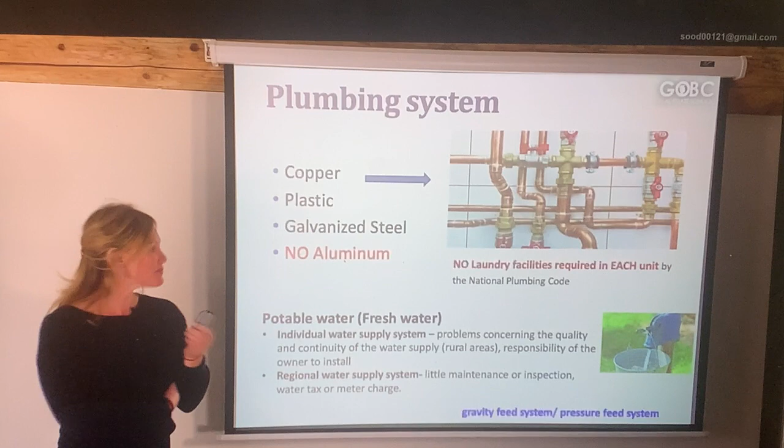Then we have the electrical code system. The Canadian electrical code says it doesn't matter how big or small the place is, the minimum requirement for every household has to be 100 amps. It doesn't matter how small or how big, the minimum has to be 100 amps.

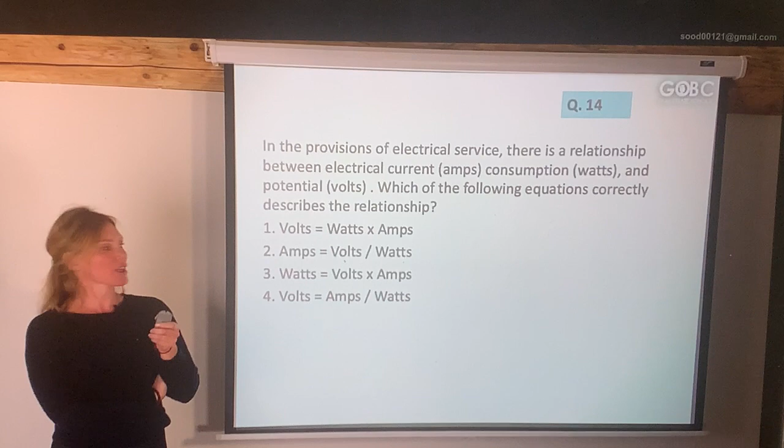Then you have to know the formula that comes with the electrical system. I remember it as a W - for me, it's women power. The W is the formula, and they'll ask what it stands for: Watts equals volts times amps. The question might ask which formula you would use, and out of all of them, you'd choose the one that says watts equals volts times amps.

Some of you will get a question on definitions - what is wattage, voltage, or amperage? They usually give a true and false statement asking what wattage stands for. I remember wattage as power - power of consumption. Amperage I know as the electrical flow. I know two out of three definitions, so I use the method of elimination - I'd suggest the same for you. Voltage doesn't have many keywords, maybe pressure of current flow, but for me, amperage is electrical flow and wattage is power.

How do you protect yourself from overflow, if you turn on too many lights and appliances at once? It's usually through breakers or fuses. Fuses is the old system, and breakers is what we use right now.

Have you heard of knob and tube wiring? It's a pretty old system but still usable. You recognize it by looking at the outlet - if it has only two holes, that's knob and tube wiring. On the exam, they might say the house was built in 1932 or some year - if built before 1950, it likely had knob and tube wiring, and that's okay, you can still use it up to this day. Everything is usable except aluminum - no aluminum.

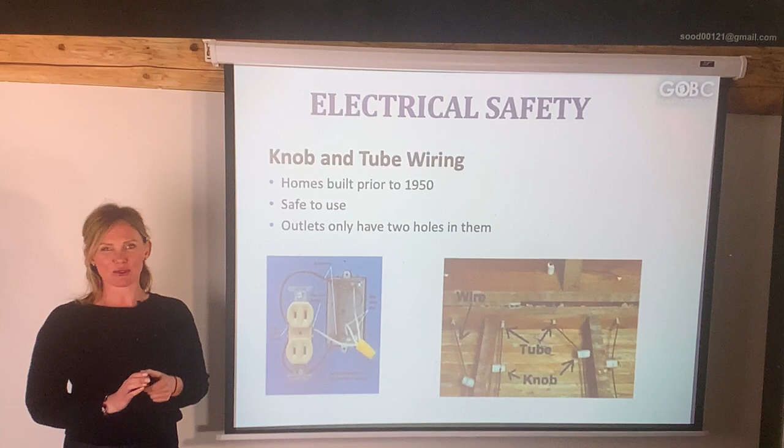Now elevators are starting to come up on the exam. They want you to know two things: what speed should be given to every elevator, and how we measure that speed - feet per minute, FPM. You need to know this for the exam. The minimum speed for any elevator has to be 200 feet per minute, or it should be no slower than 2 times the distance from the top to the bottom of the rise.

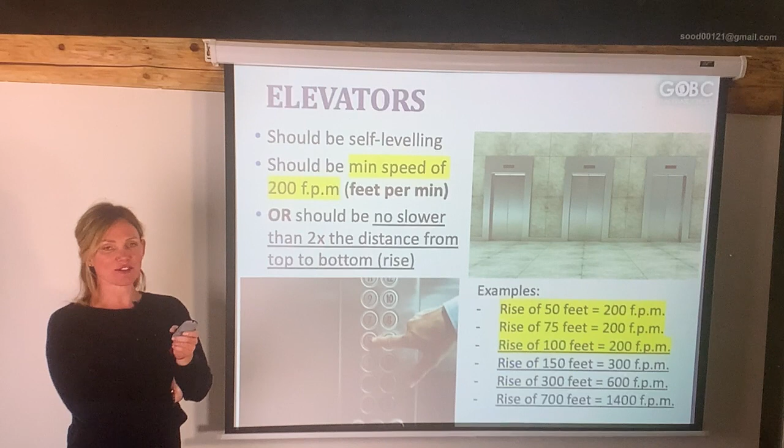For example, look at the three highlighted in yellow. One has a rise of 50 feet, and if I multiply it by 2, it only comes to 100. If I take 75 times 2, it comes to 150, and that's slower than 200 feet per minute.

So for that reason, all of those rises below 100 feet are still 200 feet per minute because you can't have it slower than 200 feet. But if the rise is higher than 100 feet, you multiply that by 2. So if it's 150, you multiply it by 2, and the speed should be 300 feet per minute. If it's 300, then it should be 600 feet per minute. So that's how they kind of look at this.

So if I give you an example, question 15, and if they ask you how do you measure that speed of the elevator, is that people? Is that floor? Is it stories? What is that? Hopefully you choose feet, right?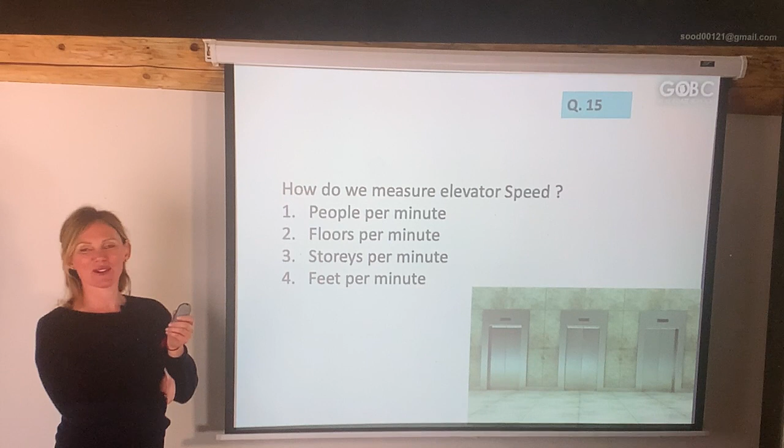So that's easy. Question 16, the Enigma is a new apartment building. The distance from the bottom landing to the top floor of the Enigma is 275 feet, okay? So that is more than 100 feet, so what are you gonna do with this number? You're gonna multiply it by 2, and that will give you the answer. So if you take 275 and multiply it by 2, that will be 550 feet per minute. If that was less than 100, then you would choose 200 feet per minute as a minimum speed.

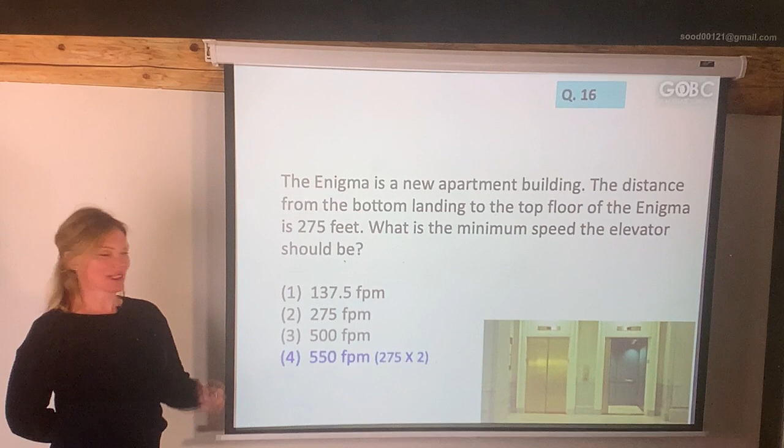Okay, we're getting to the fun part. This is the house classification style. I love this stuff. So basically, when you look at the house, you should know, what are you selling?

Is that a West Coast Contemporary? Is that a Victorian style? Is that a Tudor style? Is that a Vancouver Special style? There's so many styles of houses. On the exam, they will test you on this. They usually choose one, and they'll give you one of them, and ask, what are you looking at? What type of style is this? I can tell you which one comes up right now in the exam, but it's not going to help you because it might change next month, next week. So we're going to learn all of them.

So the very common style that they like in the exam is called the West Coast Contemporary style. This is the style that looks like the ski resort type of style, kind of built in the 1980s. You can see it has large windows, stained wood, and an angular roof. So that is kind of the definition of this style. I did highlight for you the keywords you should be looking for: 1 or 2 stories, angular roof, large glass area, stained wood. So all that is the keyword to figure out what you're looking at. So that's called the West Coast.

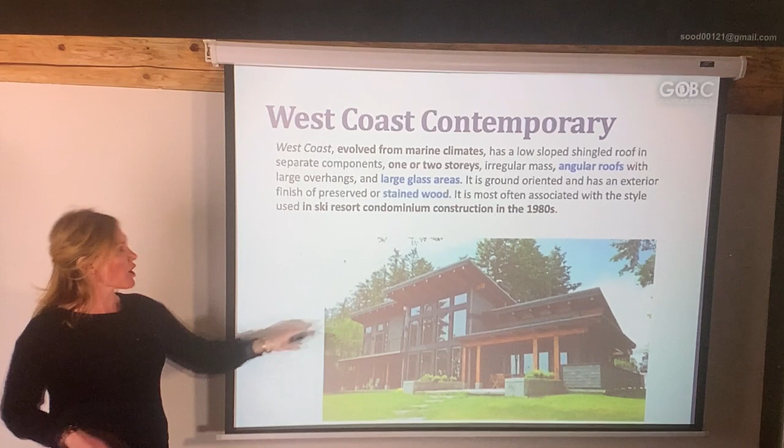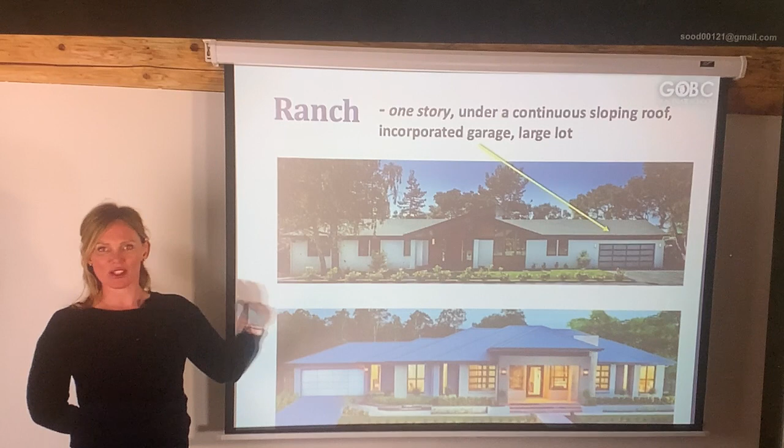Then we have the ranch, or rancher, whatever you want to call it. This is the type of house the exam will ask you about, is that 1 or 2 story house? Now, what is ranch? Ranch is one style, one roof, everything under one roof, basically. That's what rancher stands for. It says under the continuous sloping roof, incorporated the garage, meaning the garage is under the same roof as the whole house. Yes, you can have a basement, but on the exam you choose 1 story, 1 roof, and the garage attached to that house under the same roof.

Then we have the Victorian style. Now, those ones look like little castles. I see a lot of those on the island. And there's a lot of keywords in here, you can pick and choose which one jumps at you. I personally like the cookie cutter trims because I know those houses have a lot of wooden trims around the windows and the doors.

You can choose the shingle roof, peaked turrets, heavy chimneys, brick cladding, whatever works for you. That's the Victorian style house.

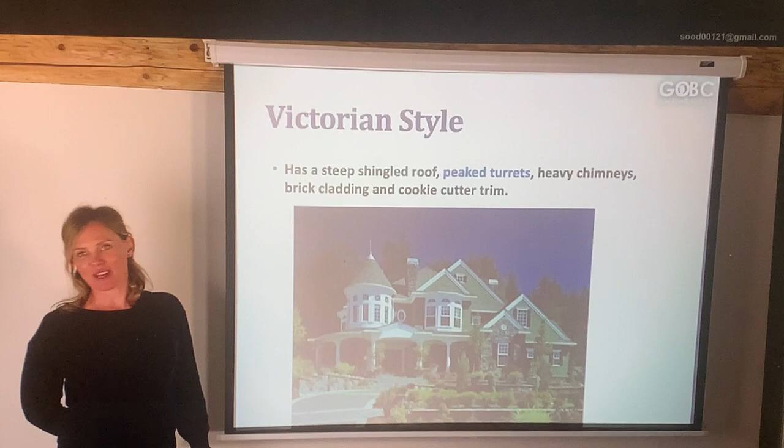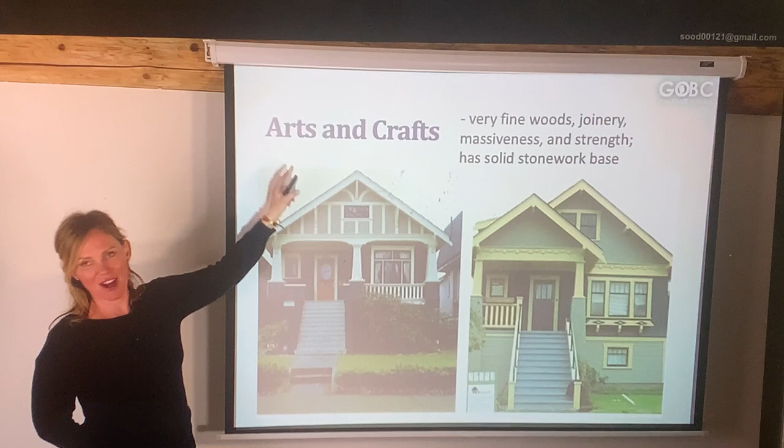Then we have the arts and crafts. In real life, we call it heritage style, the one with large covered verandas. On the exam, we call them arts and crafts, so keep it that way. You can pick and choose any keywords that you like personally, like very fine woods, massiveness, strength, solid stonework base. Anything that jumps at you, choose that and keep it as a keyword for yourself.

Then the last one is classical. To me, classical is a very symmetrical house, kind of one shape, usually 2 or 3 stories, with those white columns. That's how I know it's definitely classical style. It usually has open porches, and it has the flat or low slope roof. So that's your definition of the classical style houses.

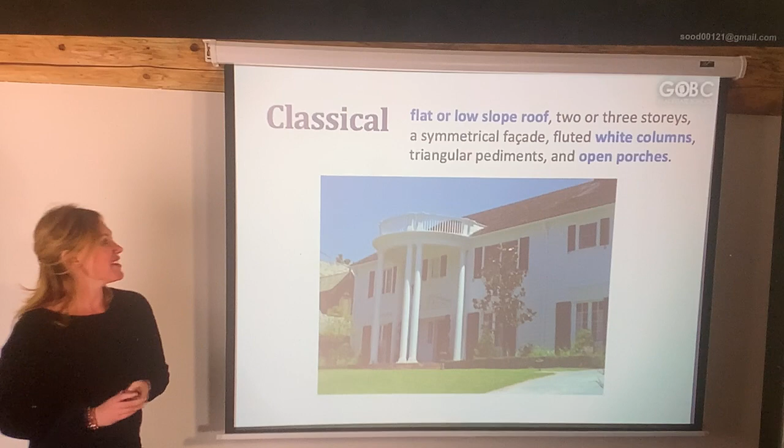What keywords did you choose? How do you know the keywords in this one? The stained wood and the angular roofs - that's what they're looking for.

Okay, so now we're going to talk about different variations of the external style. We have 4 different things that we have to know: the bay windows, the dormers, the cathedral entrance, and the vaulted ceiling.

So what is a bay window? Have you seen this, when the windows are sticking out, when the walls basically expand from the outside? Yes, that's called a bay window because it increases the size of the room. And how do you increase the size of the room? By extension of the floor and the walls. Instead of extending up towards the roof, you're expanding on the walls itself. So why is it so good? Because you can use that as square footage of the house - when you do the calculation, you can add that into the square footage.

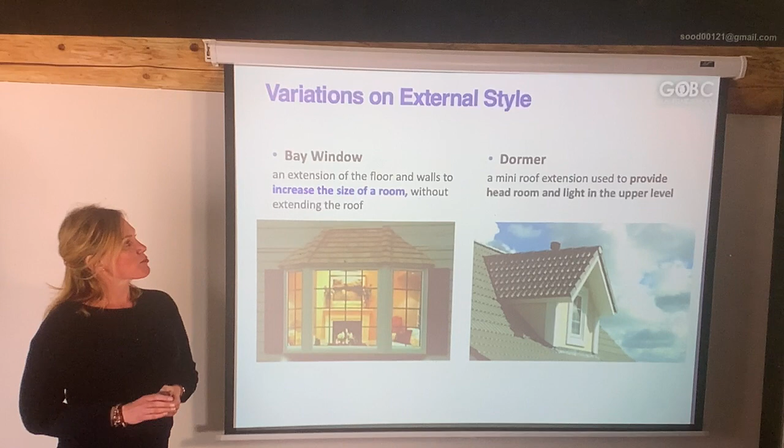Now, dormer - very common question in the exam, they'll ask you what is a dormer? A dormer is a mini roof extension, kind of extending from your roof. What it does is bring more light into the house, which is kind of nice. It provides headroom and light to the upper level.

Then we have the cathedral entrance. I don't know if you've seen those. It usually happens on the older type of houses, typically in A-frame roof designs, and it creates a high entrance hall. That's it, it's just the high entrance.

Vaulted ceiling - now what's this? That's a high ceiling, so basically your ceiling follows your roof line, all the way to the roof. It usually happens in post and beam homes when you have those beams sticking out - that's when you have the vaulted ceiling too. It's beautiful, I love it.

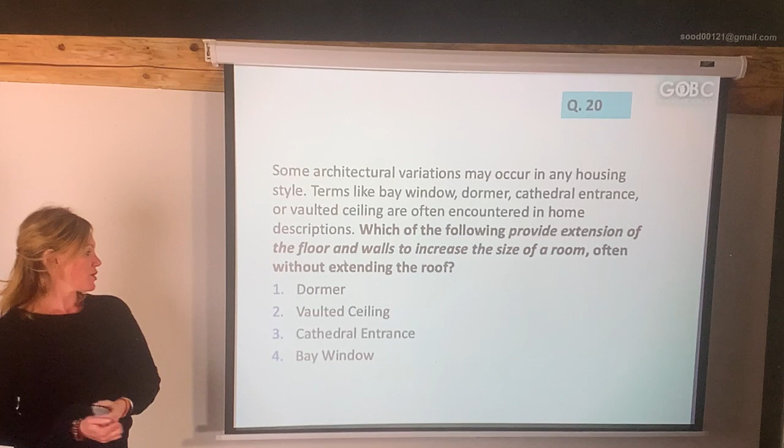Question 20: some architectural variations may occur in the housing style. Terms like bay window, dormer, cathedral entrance, vaulted ceiling are often encountered in home descriptions. Which of the following provides extension of the floors and the walls to increase the size of the room? Which one did you choose? I hope you said the bay window, that's where it extends the walls. The dormer, what is that for? That's for extra light. Vaulted ceiling is a high ceiling, and the cathedral entrance is a high entrance. Good job.

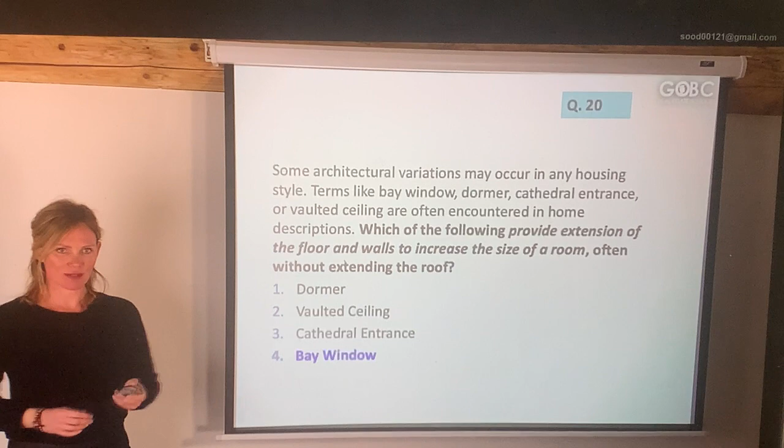The last part, I promise, no more. So this is the last part.

Okay, we're going to talk about energy efficient houses - basically, how do you save yourself energy, so you don't pay too much in bills. On the exam, they call them R2000 houses. So when you see R2000, it's the same thing as an energy efficient house, something that has a metal frame, double glazed windows, insulated doors, draft-free building envelopes, all the goodies, and the windows have to be facing south. On the exam, you have to know why it's south.

Because if you're trying to save yourself energy in the heating bills, guess what? Your largest window should be facing south, not north, but south. Why? Because it is warmer. That's what we want, it's sunnier.

Question 21: which of the following actions would not be found in the R2000 home? Sometimes they'll call it the energy efficient home, same thing. Construction of the draft-free building envelope, that's actually positive. Large north-facing windows to absorb the passive solar energy - now that, hopefully you said, is a false statement because the windows should be facing south. Good, everything else is good.

Insulation, right, that's good. So the green construction, we call it the LEED design building. A lot of times when you pull up the listings, it will say LEED design, or built under LEED. So for the exam, sometimes they'll ask you for that definition and say, what does LEED stand for?

L-E-E-D, it's the Leadership in Energy and Environmental Design. So they're trying to make the building that consumes less energy, that requires minimum care and maintenance, allows ample fresh air and natural airflow, natural light, provides healthy indoor living, and takes advantage of renewable resources like solar heat, the natural airflow, the rainwater. So whatever they can use, they'll use it to save you money and make it a more environmentally friendly building. So that's what green buildings are, and that's what LEED stands for.

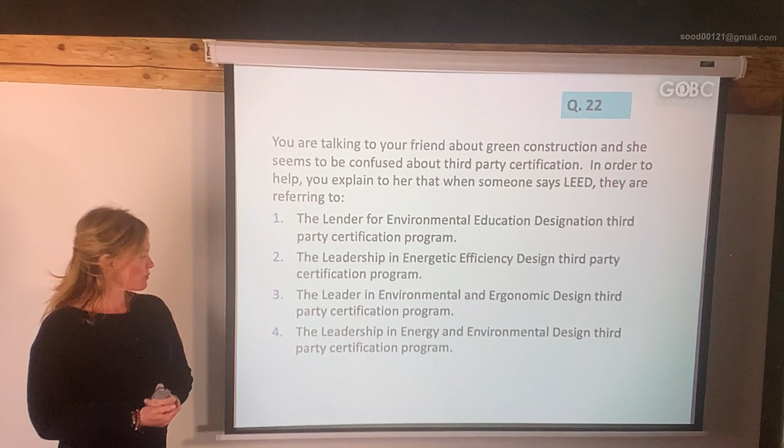So between option 2 and 4, pick your choice. Okay, option number 4, because it is Leadership in Energy and Environmental Design. That's what they're looking for.

Question 23: which of the statements regarding green construction are true? Okay, last question, I promise. Because it's A, B, C, D, use the method of elimination, okay?

Look at option A: requires less care and maintenance than a non-green home. Now does that sound like a true statement? Yep, because it should be less care, less maintenance, less of everything. So I already know that whatever has A has to be a true statement, so it could be option 1, or it could be all of the above, okay.

It's not really helping. Option B: the green home is designed to use less energy and more water than non-green homes. So, option B, you tell me - who thinks option B is a false statement? Who thinks it's a true statement? Did you pick true? If you did, then you lost the mark, because option B is a false statement.

What's the problem with option B? It's designed to use less energy, which is true, but it says more water. It should not be more, it should be less of everything. So for that reason, option B is false. So I'll let you know the answer should be option number 1, because it's not all of the above. You get the point? But we're going to continue.

What's the problem with option C then? Because I know A and D are true, so there's something wrong with option C. Green construction allows ample fresh air and artificial light. What are the key words? Ample fresh air sounds good, but it says artificial light, so that's definitely a false statement - it should be natural light. Beautiful, so C is false, and D has to be a true statement.

It's designed to take advantage of renewable resources, and that's true. But what if I say it's designed to take advantage of ALL of the renewable resources? Would that be true or false then? It would become a false statement, because there are a lot of resources - some would be true, but if I say all, then that becomes a false statement. So as you see, they trick a lot of things in here, so be careful.